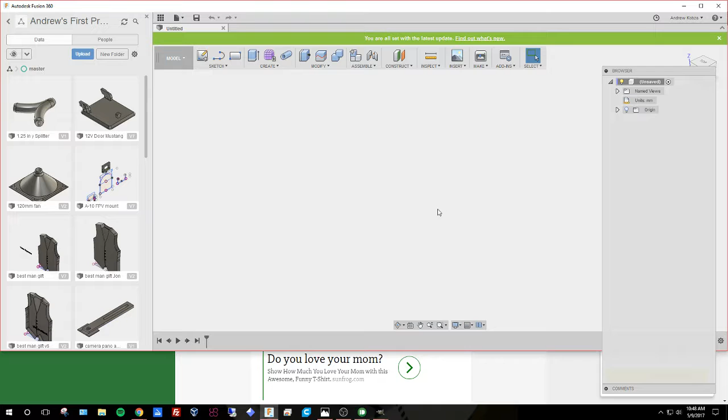Hey guys, so I've been asked by a couple people, because I do 3D printing and some logo work, to show the basics of the program I use called Fusion 360. This program lets you do anything from create drone cages so your drone doesn't crash, to fan cowlings, car parts, gifts, fan adapters, logos, coffee sleeves, and in particular today I'm going to be doing logos. I think they're really easy to do. They're a great place to start. They're kind of fun and functional. And did I mention they're easy?

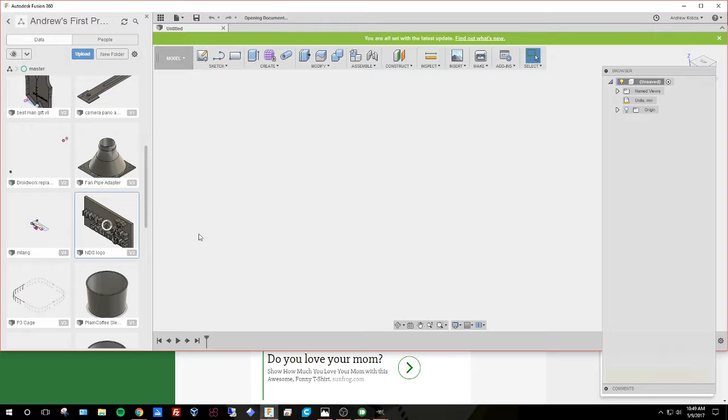So this is one I've done, just of my Naples Drone Solutions logo. That's of course the channel you're watching. But it didn't turn out so well, because if you zoom in, right here, it's 2/10 of a millimeter wide, and the 3D printer I use just doesn't like that kind of resolution.

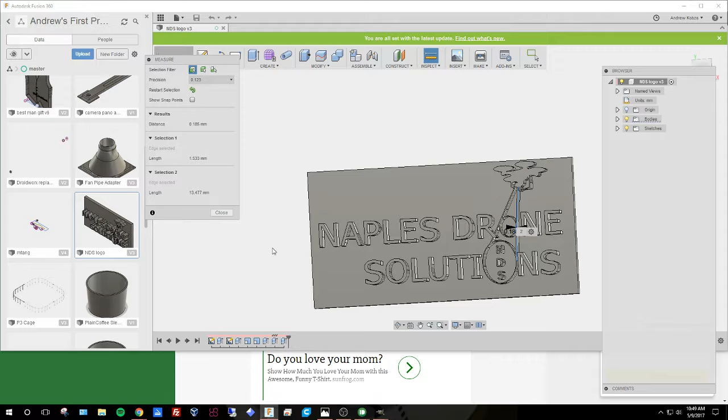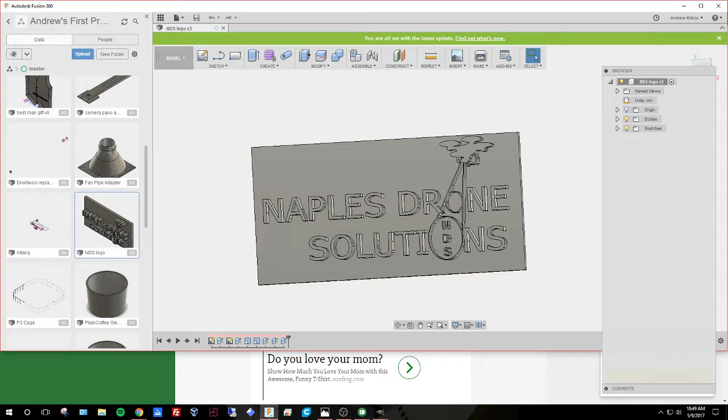So what I'm going to do is show you the basics of how to create something like this with a little plaque, and hopefully you can use it to make a 3D rendering of your own logo. So where we're going to start is we make sure we have the logo, and I've got my logo right here. This is for Mag Sheath. It's a magnetic belt sheath that I made for knives and whatnot. That's a little bit of a plug, by the way.

So we're going to start by going to Google and finding an image to SVG converter. There's other ways to do this. I know people that do it by tracing a bitmap off of an image, with a threshold set so that it's just black and white. I find this is much easier, and their program does a very good job of dealing with all the complex curves in a colored photo.

We're going to choose our file, which I have chosen here. We're going to open it, then click Convert File once we see that the file's loaded. It's going to download.

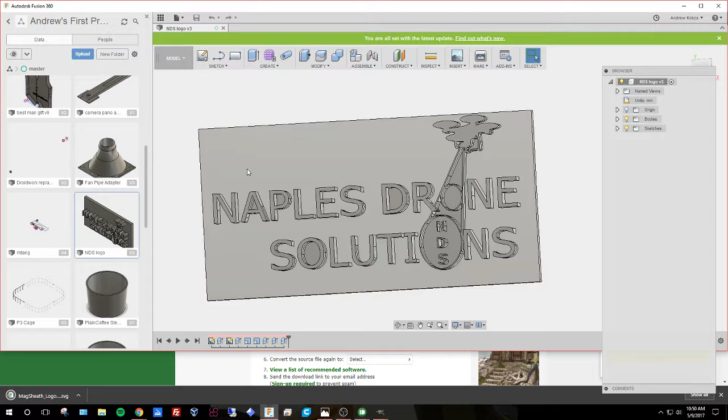Once it downloads, and we're sure it's downloaded, we're going to open our Fusion 360, which you can get for free with an educator license or even a hobbyist license. Something I really like about Autodesk is they recently made their software free even for companies, as long as you make under 100,000.

So we're going to take a new design. We're going to go to Insert, Insert SVG. It's going to ask us what we want to insert. Well, our recent download is what we're going to go to.

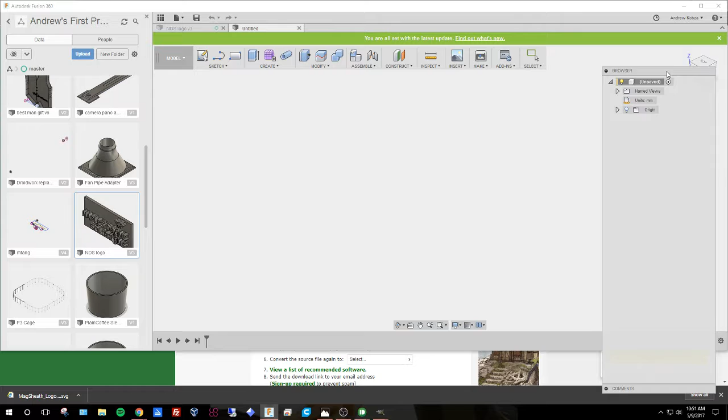One thing I don't like is sometimes this program can be kind of slow, so we're going to insert an SVG into the model.

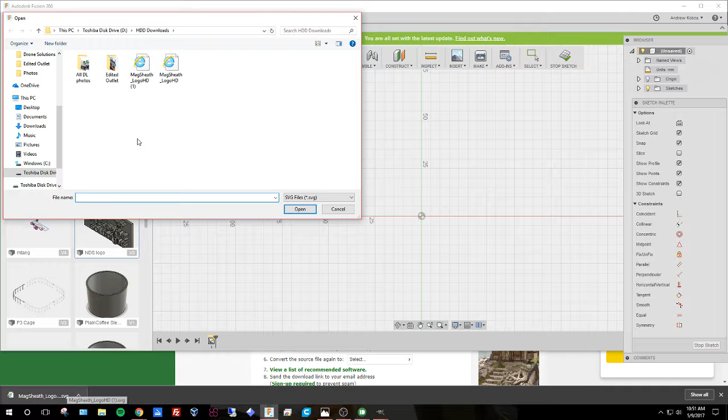Didn't mean to click that. Insert our SVG. We're going to go to our logo, and as we can see down here, it's our one SVG. I already did this earlier just to make sure it works. Wait a minute, because sometimes it has a hard time. I'm going to check our logo. Looks pretty good, but it is huge.

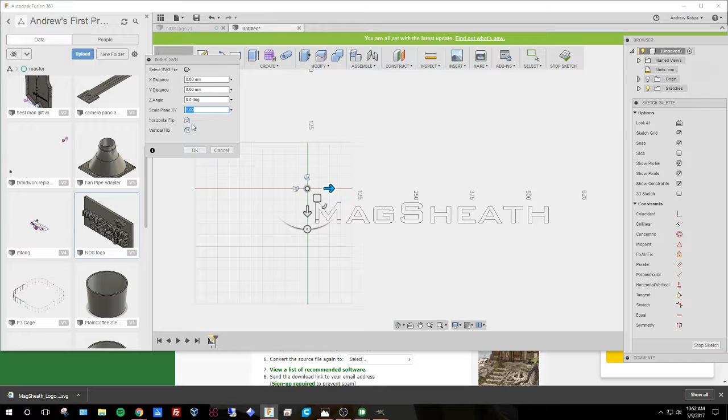We can notice that it's about 550 millimeters long, and our print bed area on the printer I use, which is an i3 Prusa, is only 200 millimeters.

So we want to scale this down to about 20%. So what we're going to do is type in 0.2 by the scale plane and hit enter. We can see that now this is around 100, we'll call that 110 millimeters.

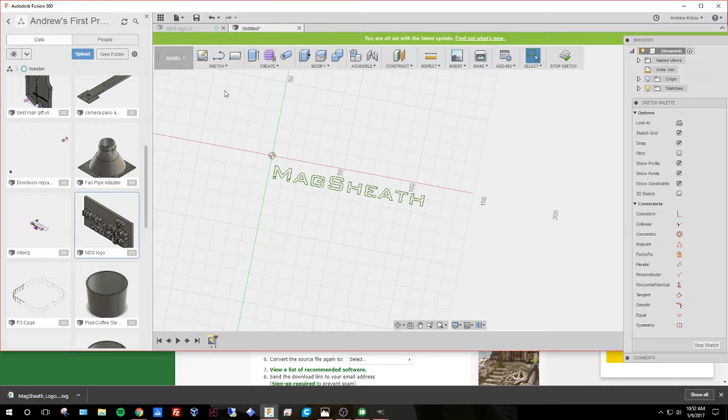So now we've got a two-dimensional shape in our sketch plane. What we want to do is make sure that not only do we have that shape, but we have the backing, because if you 3D print these letters, you're just going to have a bunch of individual letters, and we don't want that. We want it to be stuck on something that we can display like a plaque.

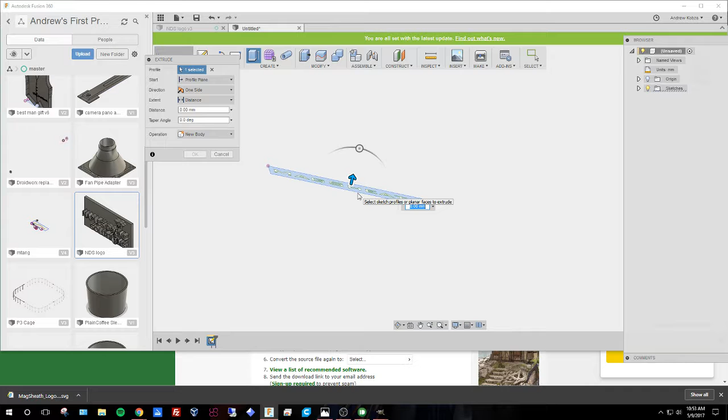So we're going to make this square area, and then hit E, which is extrude, and pull that plane out. We actually want to pull it in a negative direction because we're going to be pulling the letters out. So we're going to pull it out -3 millimeters. And if you like something like that, then you can have your logo just be that.

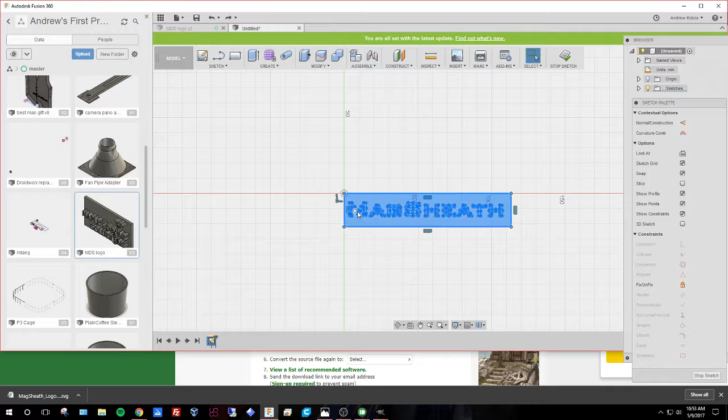But what we're actually going to do—I did that wrong—is you're going to want to make sure you select all of it, because if you select just the background, you're going to get that, and then there will be nothing for your letters to adhere to. Now we're going to take that, extrude it -3 millimeters, and we have a full plane.

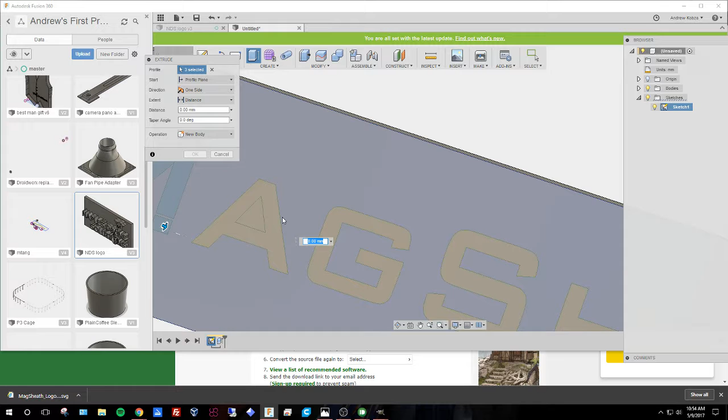Then we're going to go back over here to our browser. We're going to turn back on the sketch, because by default it turns the sketches off. Now we're going to extrude our logo. We're going to hit E, and make sure we click only the letters.

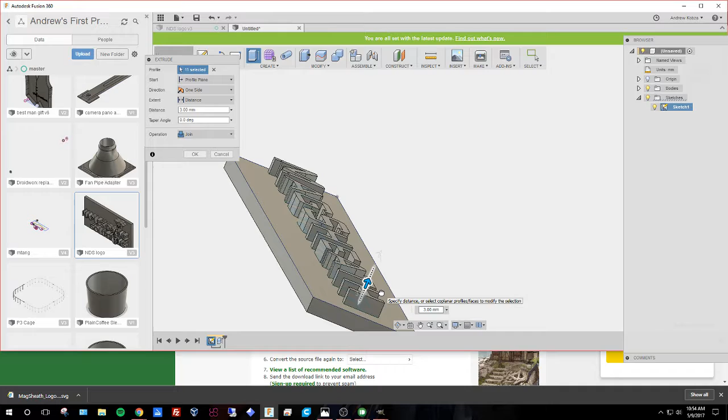I'm not sure what I want to extrude this as, because I want to make sure it's deep enough but it doesn't look weird. So like that would look weird and probably have a pretty hard time printing. But I do want it to come off a little bit. So I think 3 is a good one, so we'll just make it 3.

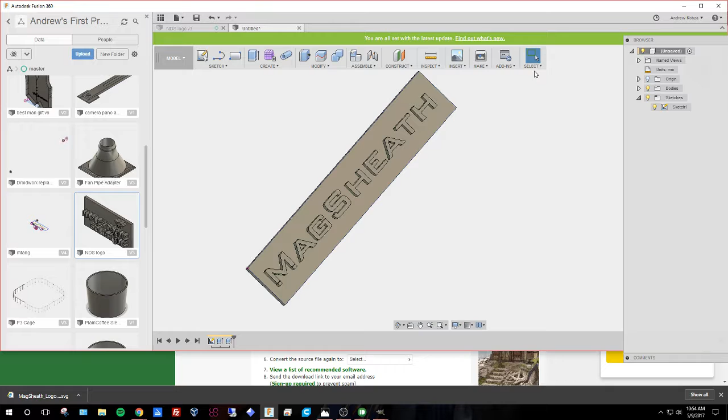Now you can see that we have this 3D shape, and we've got our logo. It says MagSheath. It's pretty cool. Now we can print this out of PLA, ABS. You could even make a cam automation and set this up to be CNC'd out of a block of aluminum.